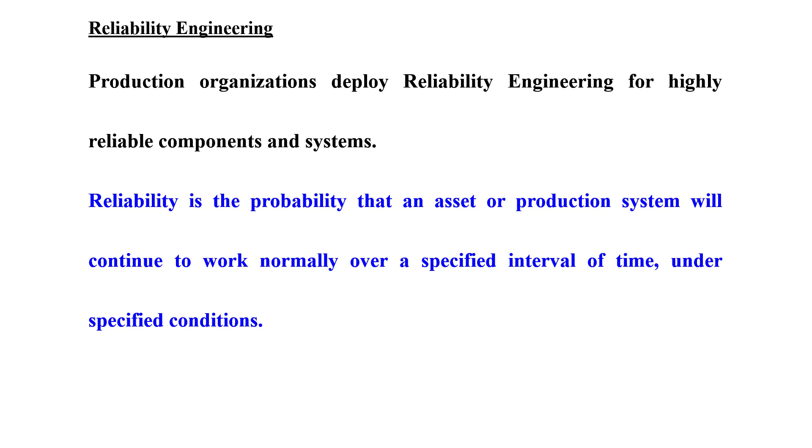Let me just introduce reliability. Reliability engineering actually is a concept and strategy and management issue where many production organizations employ this approach to get very highly reliable systems, very highly reliable equipment, very highly reliable machines.

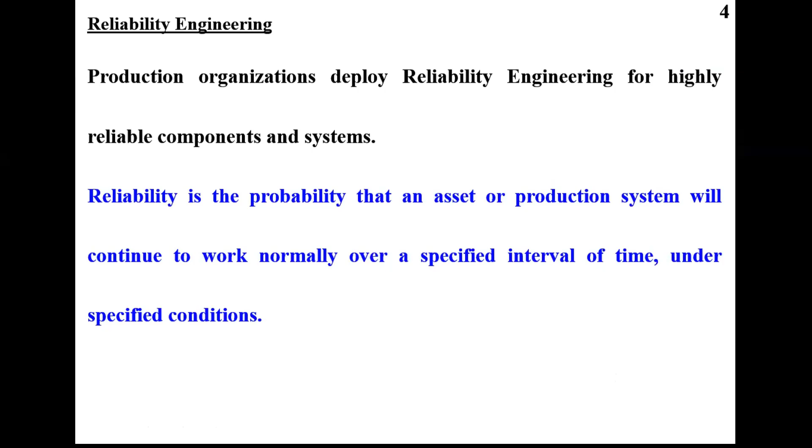What is the meaning of reliability? Reliability actually has many definitions because it covers a lot of issues. From the mathematical point of view, it is the probability that an equipment or any system or any production line will continue to satisfy the needs of the customer, the needs of the owner, the needs of the user, according to its operating context, according to whatever the context of operation.

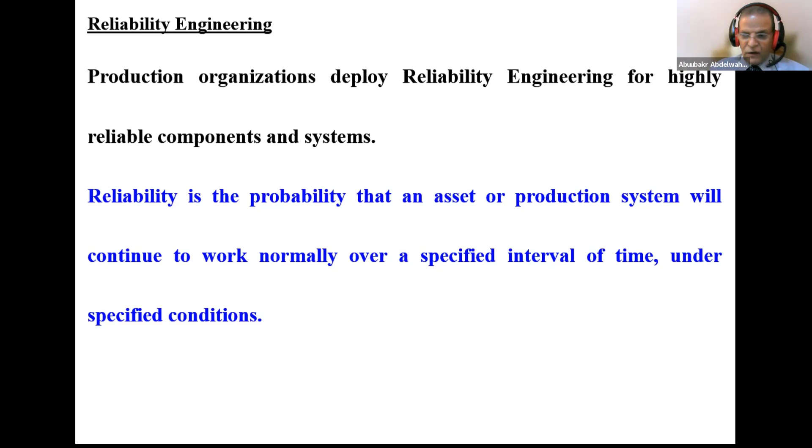And reliability actually is measured at a specific time. It is not a general term. It is a term related to time because reliability changes with time. And it has to be evaluated at a time and under specific conditions, under specific operating conditions.

Let me start with this question: how do production organizations deploy reliability engineering techniques? What tools are they using, what strategy are they deploying, what policy do they implement? Actually, these are general topics we will list, but later on we will go into detail about this list. The first is reliability centered maintenance. This is one of the techniques we will cover and it is one of the very major pillars of reliability engineering.

Failure mode and effects analysis, another important technique. Root cause failure analysis, condition monitoring and condition-based maintenance, proactive maintenance and predictive maintenance. And also how we can improve our work control through the most important six phases of any maintenance management, including how we can control the initiation of our work, or work request, whatever we call it.

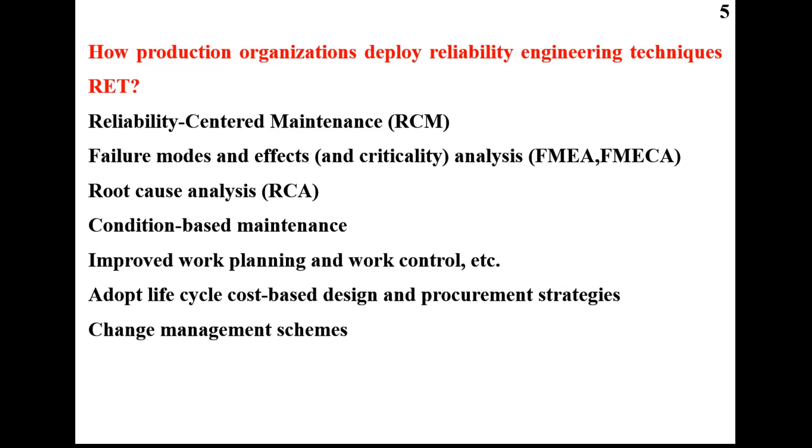We're going to discuss these phases in detail, and every one of these generations is actually associated with a change in the equipment itself. The equipment design itself changes. The first generation equipment was very robust, very strong, with very high safety factors. But this is now not the case. In the first generation, equipment was very simple. It was pure mechanical or electrical equipment.

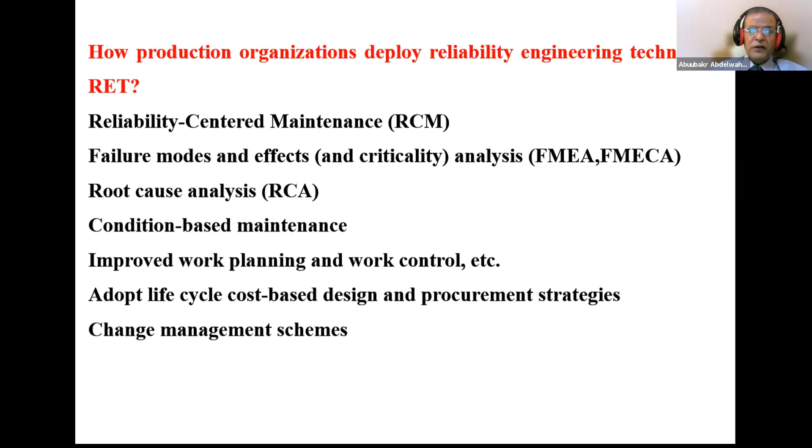However, nowadays our equipment is very sophisticated. It includes mechanical components, electronic components, computer systems, sensors, and a lot of complication, which is also associated with the generation. Starting from the first generation, things started to be integrated and complicated as we moved from one generation to the next. So management has to change, to be aware, to be committed to this change, and to be prepared for it.

Unfortunately, although these organizations try to deploy reliability, the adoption of reliability either is not there, is not in their mindset, is very slow, or has not succeeded. Why? Most organizations actually suffer from this issue. Yes, they say we are applying reliability, planning, quality control. However, the adoption is not to the extent we expect. Why? Actually, it is not hard to implement and succeed.

Yes, it takes time. It needs effort and investment, and management has to be aware of and committed to this requirement. We will not get it without sacrifice. We have to pay for it. Unfortunately, many managements and companies are reluctant to offer this, reluctant to allow time. They need very fast results. They appreciate the fast team who can repair equipment very quickly whenever it fails. However, this is not success.

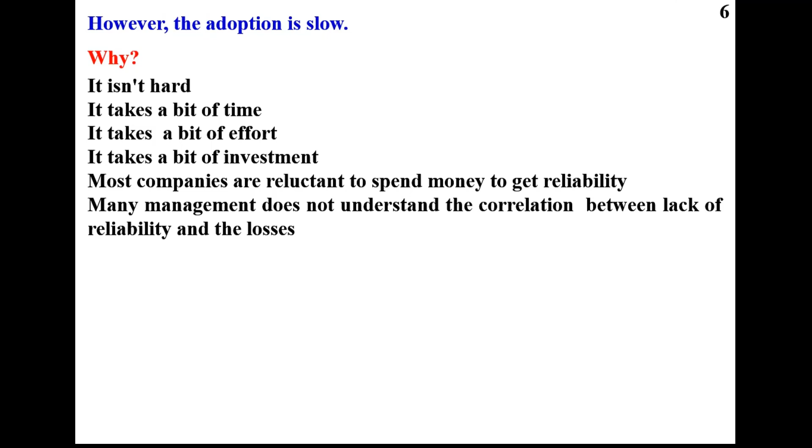Unfortunately, some organizations and managements still consider maintenance a cost center. Cost center means whenever they come to cut an expense, they start with maintenance. They need to understand that investing in reliability is an investment, a business. They still don't understand the correlation between reliable equipment and profit.

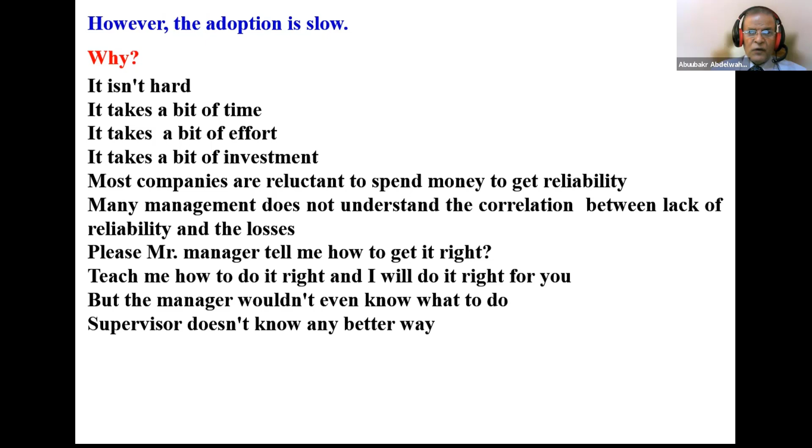Unfortunately, management cannot tell their people what is right. Please, Mr. Manager, tell me how to get it right. I am willing to do it right, but teach me how, and I will do it right for you. But the manager wouldn't even know what is right and how to do it right the first time. The supervisor does not know any better way: we have been doing this for 20 years, and this is the best way we know.

The supervisor gives a task assignment to his technician just to go and do it: replace that bearing, replace that belt, install this flange, without any work procedures or work details. What tools to use, what specification to follow, what material, what standard, what clearances, what allowance. They don't tell all these details. The planner writes the task very briefly. Even with a good planner, the plan does not include details or procedures.

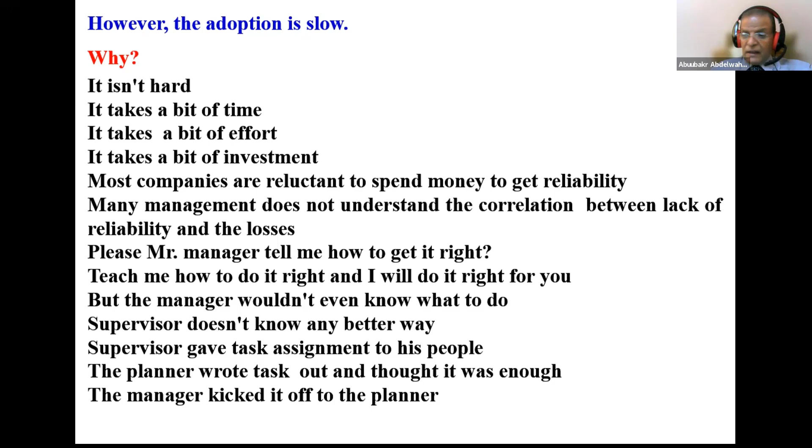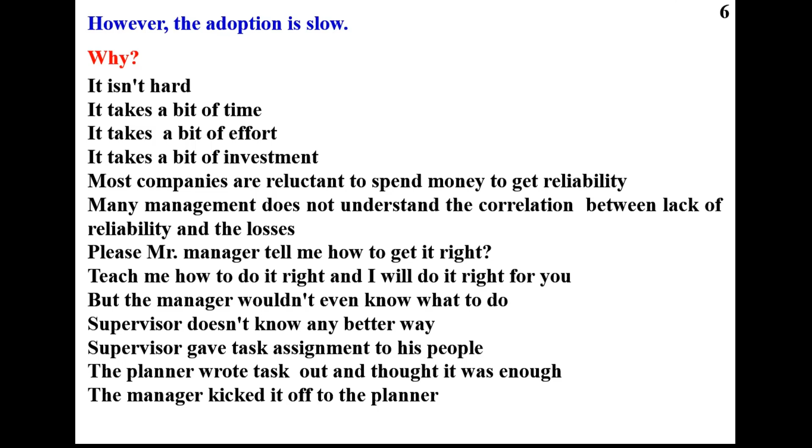And whatever we realize from many samples of planners' activity, we see actually very short details about the work, not enough work details. The manager kicked it off to the planner and asked him to do the plan. So this is a list, just a list of answering the question why, why it is very slow or even not succeeding to implement reliability engineering or reliability management. It's just a list of examples of answering that question why.

Let us see this example of one sample of a work plan. The planner prepares a job plan sometimes like this: 15 steps or 15 items within his plan to do some job. Number one, prepare work area, isolate and hand over. How to isolate? What is the procedure of isolation? Isolation needs certain standards, certain procedures. So how to prepare the work area, not including the details, the procedures or the specification. Isolate and hand over, even not including details. So everyone will do it his own way.

Access blocks and bearings. Nothing related to what type of bearing, what clearances of bearing, what specification, what standard. Tolerances, what tolerance? What is the amount of tolerance required? Measure bearing internal clearance. Okay, I will measure it. So what? What after measurement? I have to give him more details. If the clearance is less than or greater than, there is some action that has to be followed. Measure base plate. Okay. After measurement, what is the action? What to do with this measurement? What should it be?

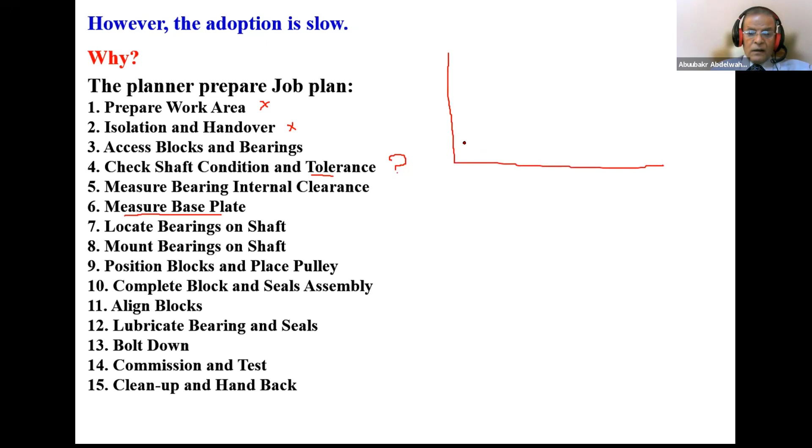So this is, as we see here, just brief steps of getting work done, which is not reliable. And if I ask 100 technicians to perform that list, every one of them will come with what we call wide variability. Wide variability means if we get the result of all these technicians, we will get something like that. Every one of these technicians will get it in a different way. What is the optimum? The optimum is to be like this. We hope to get it like this. So the

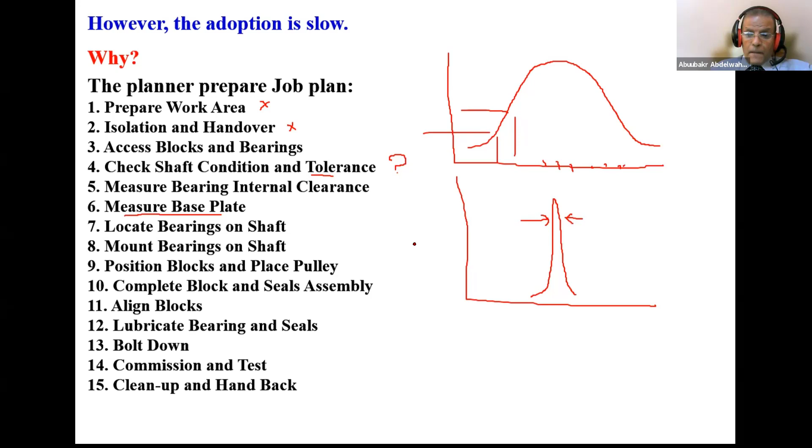So what to do? What is the right thing to do? To answer this question, the answer will actually continue with us till the end of this course, because this is mainly focused on answering this question: what to do, what is the right thing to do.

So our course is an introduction to the concept of reliability engineering to get a very highly reliable product, component, or equipment system. We introduce reliability engineering, which will cover methods of reliability analysis for design and assessment of components, behavior of engineering systems, how they will behave, probability of failure, how to control our failures through studying the probability from live data samples collected from our real equipment, how to improve our assets, how to manage our assets, how to manage our maintenance, and how to take the proper maintenance decision.

By the end of this course, we will be able to start the process of managing and organizing our reliability center or reliability department, which again is an answer to the question we previously highlighted. Understand the elements of a reliability program. What are the elements of a reliability program? We will broaden our technical ability, knowledge and background to tackle and deploy asset reliability in a more effective and more efficient way. What are the reliability characteristics that are critical to our system, so we can manage, control and prioritize these characteristics.

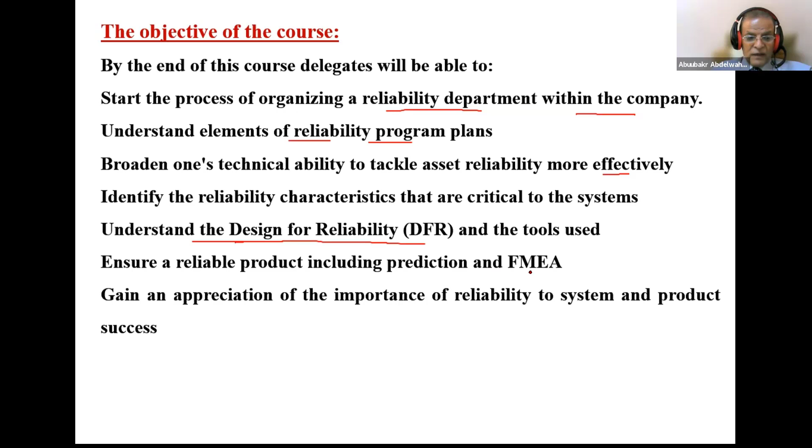And what is the meaning of design for reliability? Unfortunately, we suffer from many defects in design because our designers most of the time put more effort and emphasis on design for strength and design for stress, but not design for reliability and not design for maintainability. So it is our role, it is our duty, to feed these designers with what is needed for our equipment so they consider it in their design. We also cover parameters to ensure product reliability, including failure mode and effects analysis.